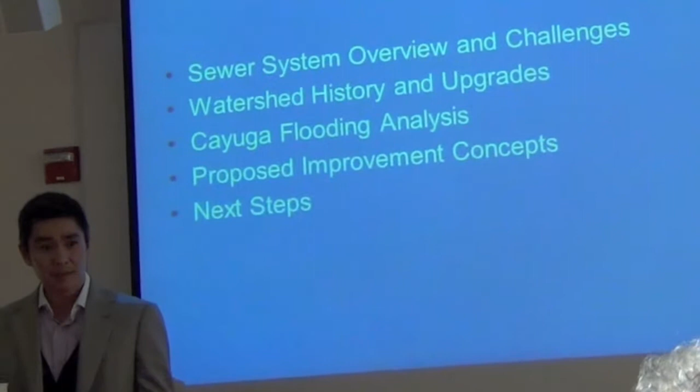So we're going to go over a couple of things in this presentation. First, I'm just going to give you a little background on how the sewer system currently works and some of the challenges we're facing. Then we're going to transition over to Kathy to give you a little bit more of a technical explanation of how water is flowing within this watershed that you live in. And we'll explain what these watersheds are and how the water is draining.

What sort of analysis we're looking at specifically along the Cayuga area as far as what we're looking at right now, and you'll see that they're not easy solutions, and they're pretty complex solutions. And then we'll go over some of those proposals, and then we'll go over the next steps and ways we're going to continue to work through this process.

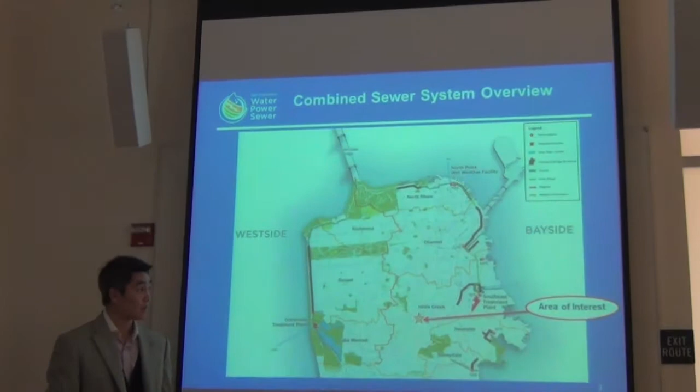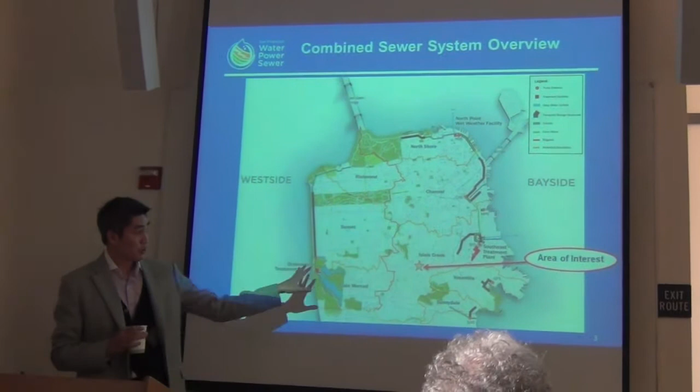But none of these solutions are going to be, and I preface this now, the complete solutions. The Public Utilities Commission is the agency responsible for the operations and management of the sewer system. And of course, all of you know that we also deal with the drinking water system and municipal power. But all in all, we have about 1,000 miles of sewer pipeline that cross every single city street. We have 2 24-hour treatment plants that are treating water and a 3rd wet weather facility.

So on a normal day, we're treating about 70 million gallons of sanitary sewage a day, so a day like today when it isn't raining. When it does rain, the system actually treats about 500 million gallons of combined stormwater and sanitary flow.

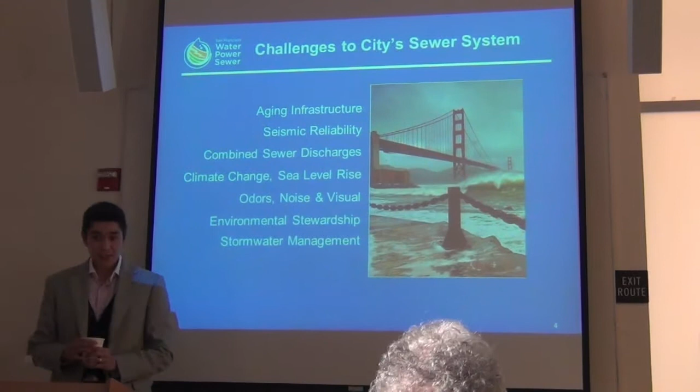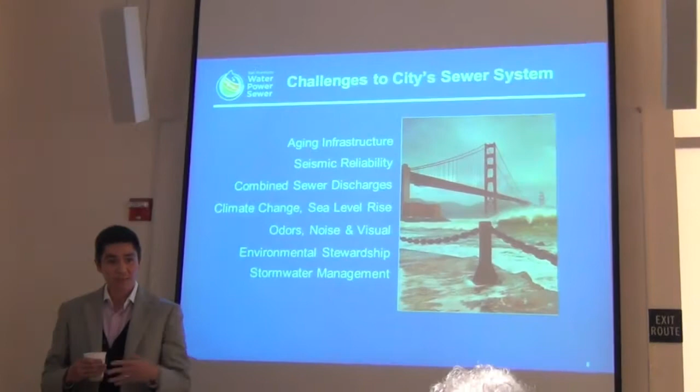Some of the challenges we're dealing with right now are along these fronts. We have obviously a very old system with San Francisco being an old city. We have sewers dating back all the way to the gold rush, and of course we're working as fast as we can on a repair and replacement program to replace those. Seismic reliability, making sure that our facilities are in good standing order so that when we do have an earthquake, when it does happen, that we're able to resume service without interruption to homes and businesses. Combined sewer discharges, and then of course stormwater management, which is the focus of what our talk is today.

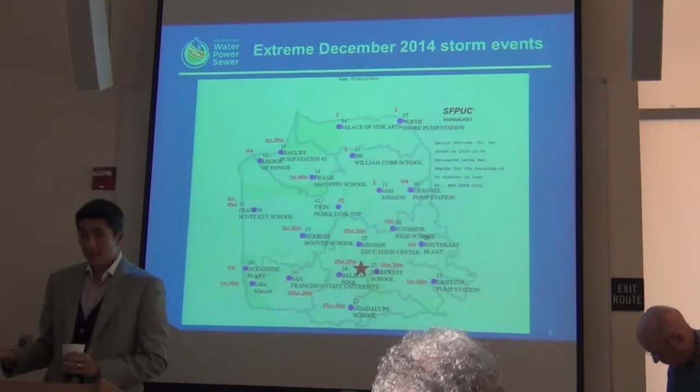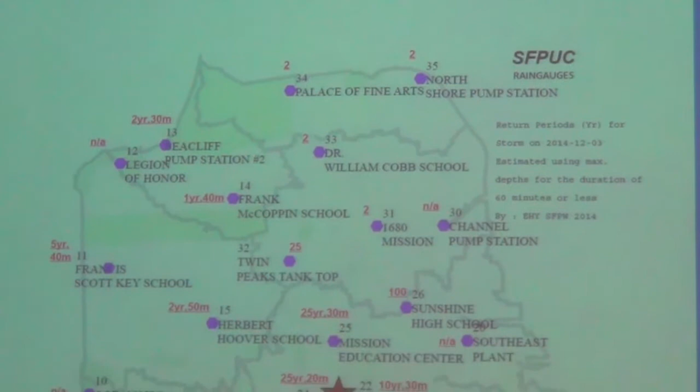So here's what happened in December of 2014. The system is designed to carry a certain amount of flow in it. In this case, the engineers call it a 5-year storm criteria. So it's really just a probability of how much water is going to be flowing within the system for a given period of time, and what the probability is of that occurring.

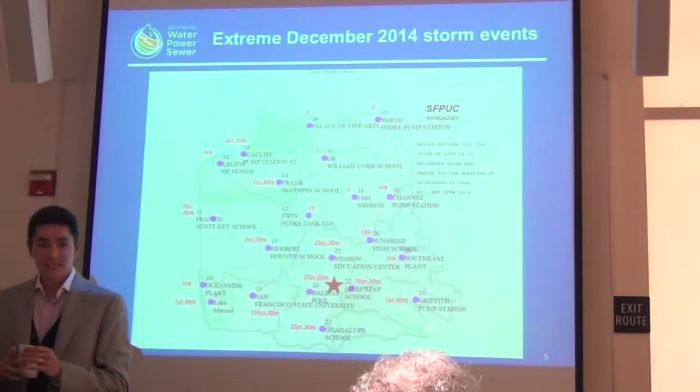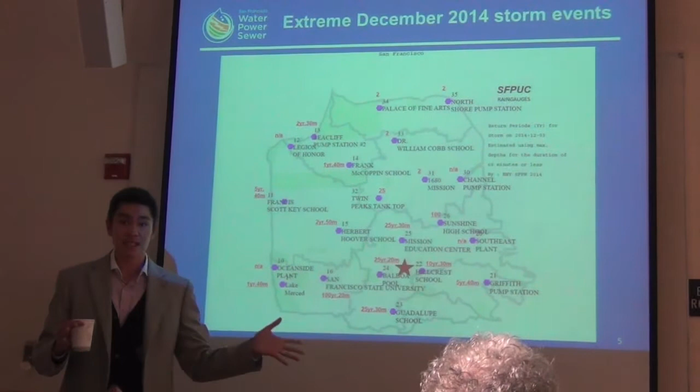What we saw on, I think this is the December 3rd storm? Yeah, so the December 3rd storm, we saw a lot of water, and everyone remembers that storm especially. We had a 25-year storm, meaning there was a lot of water that fell within a very short window of time, overwhelming not only the sewers over in the Cayuga watershed, but sewer systems throughout the entire city. There were manholes popping open because of the amount of water and pressure that were flowing through, and we had significant flooding in other areas of the city besides Cayuga.

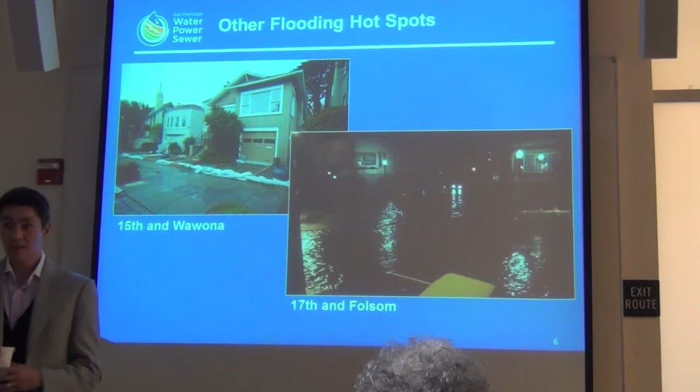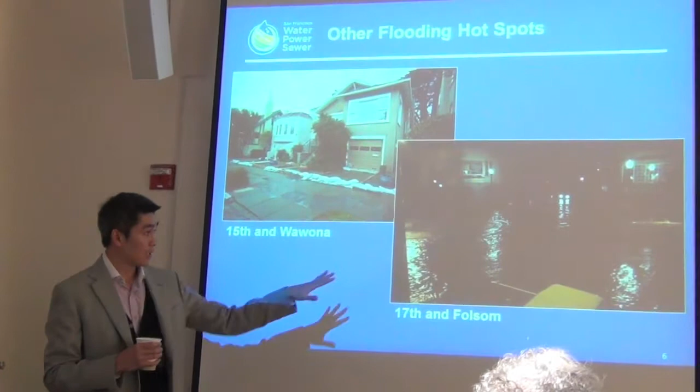These are 2 other areas of the city which experienced flooding during the December rainstorms. 17th and Folsom is an area where we repeatedly see flooding, where the amount of stormwater flow gathering within that area is greater than the system can convey out of there, and so this is what results. We also had flooding over at 15th and Wawona.

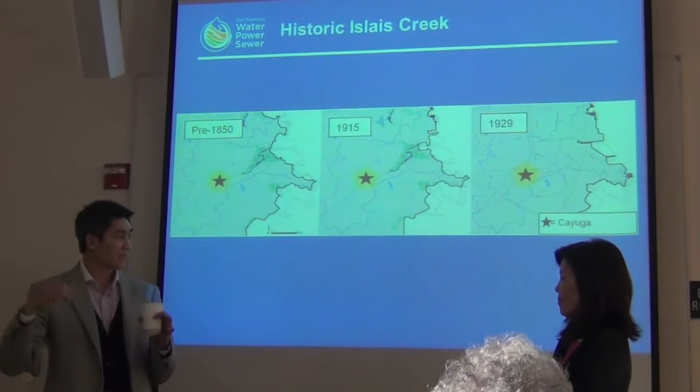So now that we've laid the context of the overall system and how it's functioning, I'm going to transition over to Kathy. She's going to give you a walkthrough in time of what this area used to look like before, how the water is flowing through it, what area it's collecting, and what the watershed is made of, and why we're seeing the challenges we are facing today, and then some of the next proposed concepts.

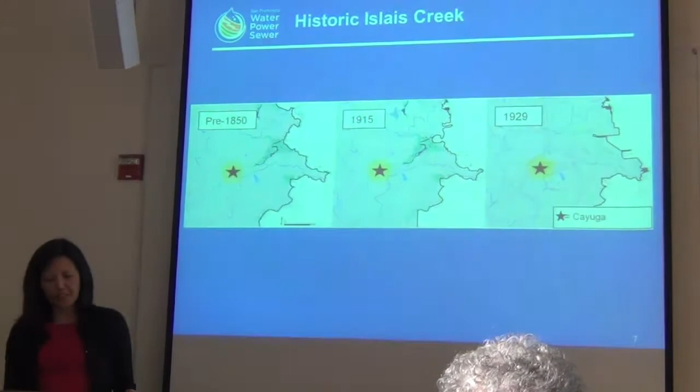So until the early 1900s, the water flowed from the tributaries in Upper Glen Canyon and Outer Mission to Islais Creek and flowed through the neighborhood surrounding Cayuga. This slide shows how Islais Creek's original flow pattern to the bay has been obstructed by the fill in the bay.

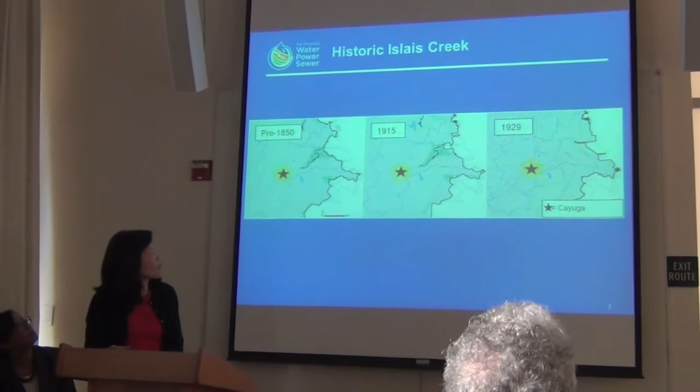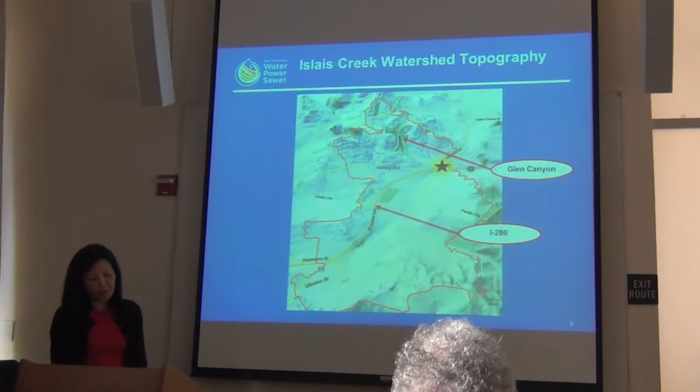The highest reaches of the drainage area just south of Twin Peaks are among some of the highest elevations. These, as well as High Point in McLaren Park and the Excelsior, form a classic valley where Cayuga runs along the bottom about 700 feet below some of the highest points.

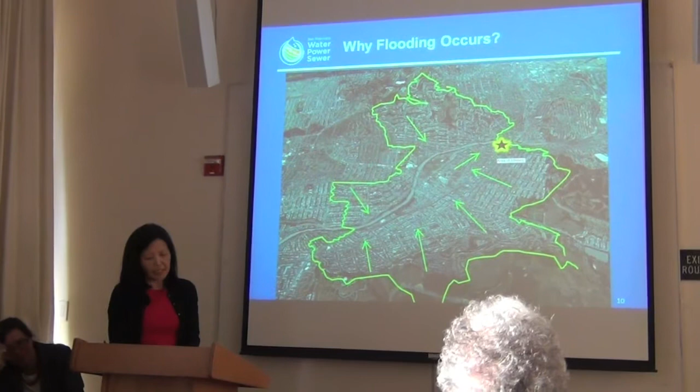And so this just shows why flooding occurs. There are hydrologic and hydraulic factors that contribute to the flood area. The local topography - Cayuga and the vicinity form a natural low-lying area where historically the Glen Canyon tributary merged with the rest of Islais Creek. These creeks were all connected into the sewer system.

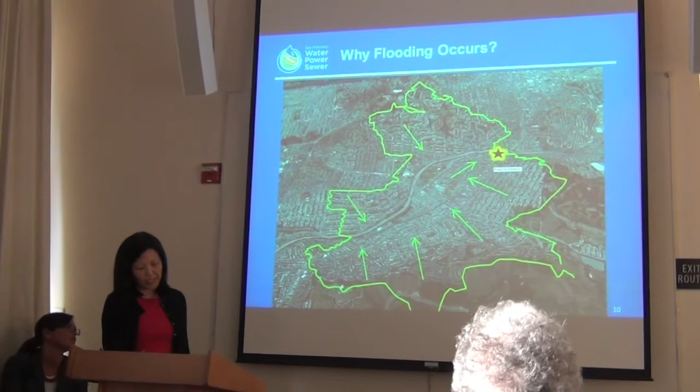The collection system is at capacity. Stormwater accumulates on the street in these low-lying areas. The natural drainage that has been available in the past is basically obstructed by the freeway construction.

Rainfall and runoff from the drainage basin, about 2,800 acres contributing runoff to the vicinity of the flood-prone Cayuga Avenue, is steep and highly urbanized. Rainfall falling on the drainage area turns to runoff almost immediately because of the urbanization and enters the combined sewer system and is conveyed to points downstream.

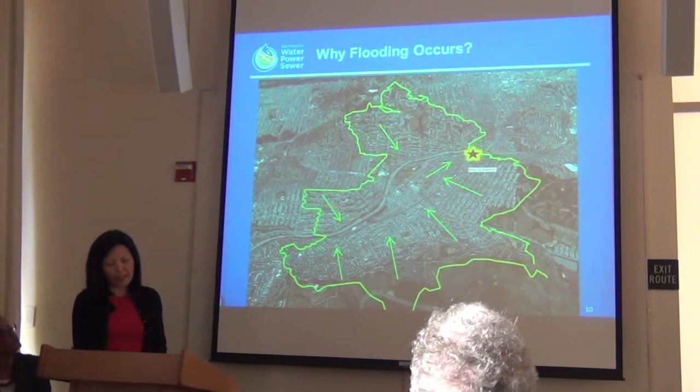The time it takes for the flow to travel from the upper drainage reaches to the foot of Cayuga at 280 is really short. The large drainage basin combined with the steep terrain can lead to significant flow in the collection system in a very short amount of time during large storms and even short storms with high rainfall intensity. The present sewer system is not capable of carrying the extreme flows that happen in a short amount of time.

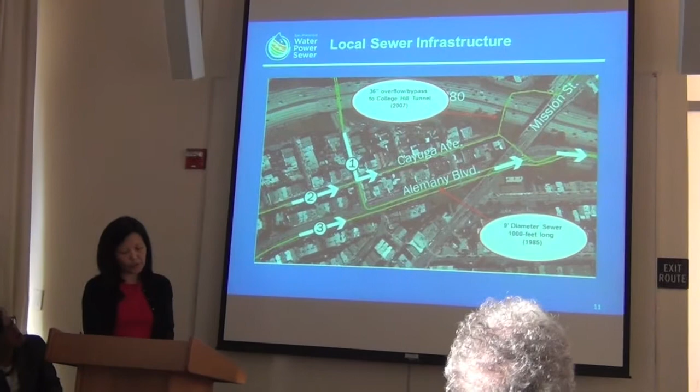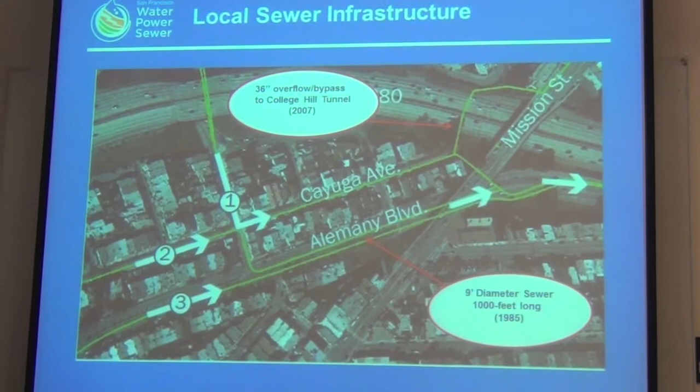So here you just see the sewer system that's at the foot of Cayuga. There are 3 major sewer drains that catch the surface flow. There is trunk sewer number 1, which carries sewer from Diamond Heights, Glen Park, and Bosworth. Trunk sewer 2 carries southern and western drainage and Cayuga Street flow. Trunk 3 carries all the eastern side and it is under Alemany Boulevard.

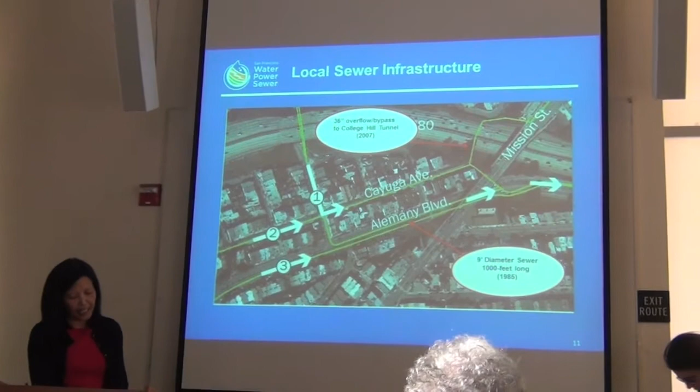So what's been done is that a new 9-foot diameter sewer was built in the 1980s, as well as a 36-inch bypass or overflow connection from the 9-foot Cayuga sewers to an existing College Hill tunnel in 2007. But even with this, they all still merge at the end into a 10-foot sewer, and so there's still not enough capacity.

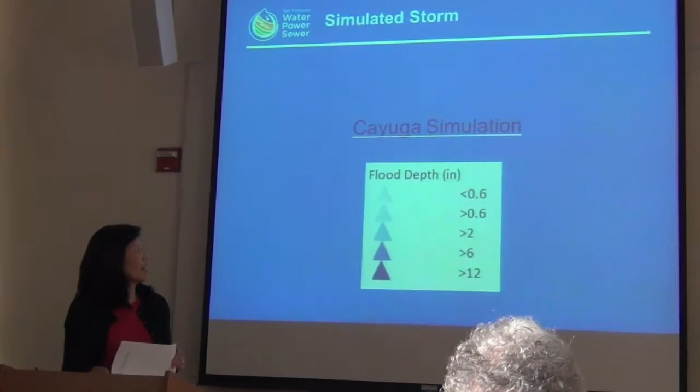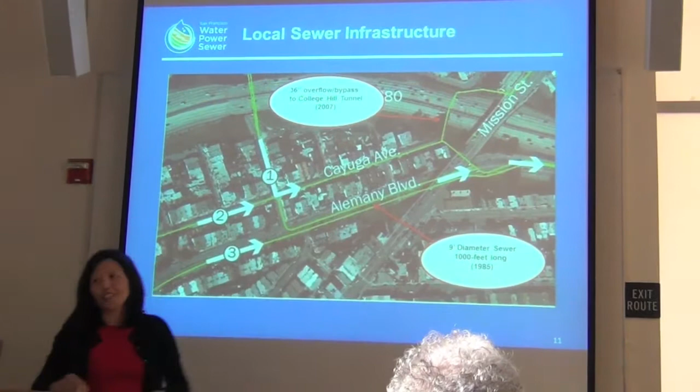Excuse me, where is that 10-foot sewer? That's at the end of Cayuga? That's the arrow, that's after it passes off this slide. So can you just show how everything comes together? So we have 1, 2, just making sure it's white on the map so people can see.

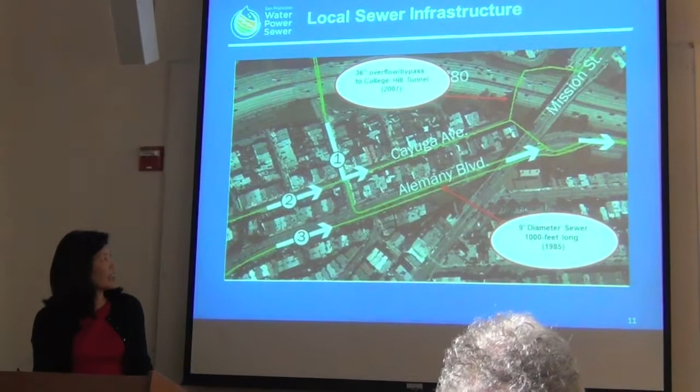What diameter is the tube under Cayuga? That's under Cayuga is 9 feet. 9 feet? Right, number 2 is 9 feet. Number 3 is smaller, but then Alemany, the auxiliary one which shows in 1985, that's another 9 feet. But they all exit the whole area into a 10 foot at the end.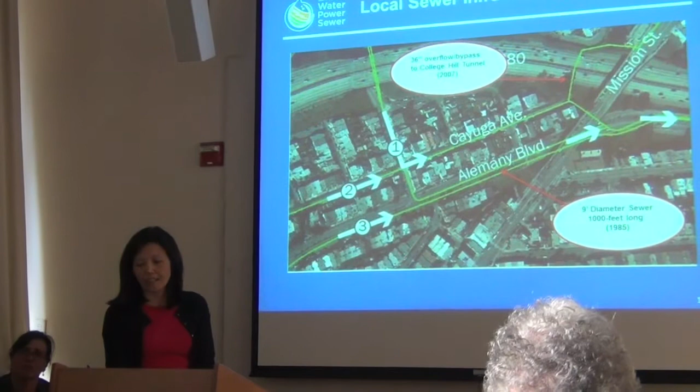At the end of where, Alemany? At the end of where? Past under, you can just point at the end. Somebody point to it. It goes there. Point it out. Right, that arrow. Can I suggest something?

The maps from the sewer show that it's 9 foot under there, but there's a box divided in 2, and each of those 2 is 10 feet by 6 feet that go under the freeway. So the capacity under the freeway is greater than the 9 foot. So I'm trying to understand why you say the construction of 280 is the problem if they gave us the capacity to move all of the water.

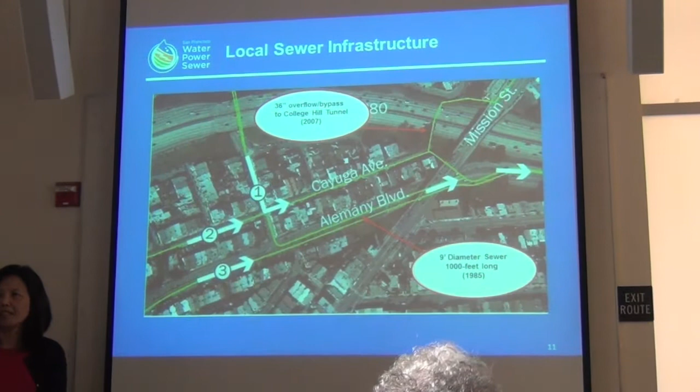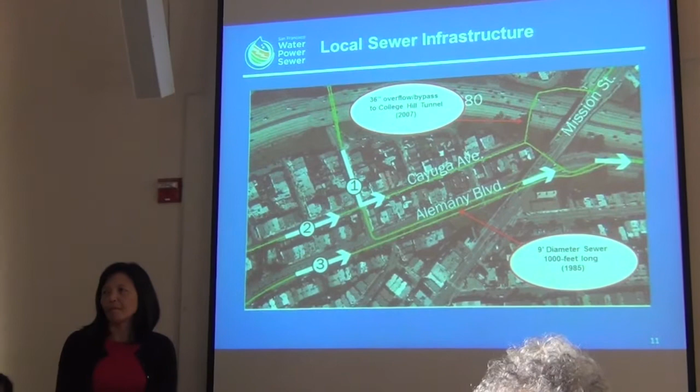Where does the backup begin? If the water flows under the freeway and it has the capacity to carry all of this, where does the backup actually begin? It has the capacity to move the water on regular days like today, what we call a 5-year level of service storm. However, when it's like 25 years...

No, what I'm asking is, I'll cut to the chase. Down there at 400 Alemany at Folsom, the sewer is about 2/3 as big as it is under the freeway. I'm suggesting to you that the problem isn't 280, because they have the capacity to move all of this water. The problem is down at 400 Alemany, where the sewer is seriously constricted. That's the bottleneck. And actually, I don't think we're saying that 280 is the cause of all the problems.

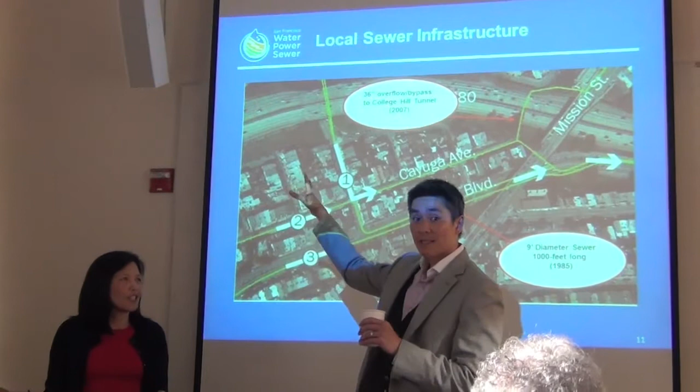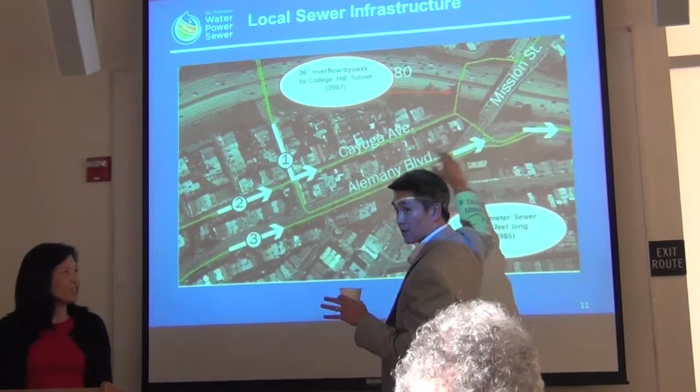You said it 3 times. If we're saying jump back, I mean, the major issue is the amount of water being drained in through the sewer at any given time, right? So you're right, this trunk line is larger in capacity as far as those 9 foot diameter tunnels. Still, that's rated to take a certain amount of flow, which is that 5-year storm we talked about earlier. So anytime you get a storm greater than that 5-year storm, or more rainfall being contributed, that's still not enough.

So even a 10 foot is not large enough? No, what I'm suggesting is that the bottleneck isn't there, the bottleneck is further down. I'd like you to address that question. But I can wait until later if you want. Why don't we just keep going with the presentation?

Could I just throw in a simple question? That 36-inch overflow bypass, which direction does it go? It's connected to College Hill Tunnel. Yeah, but which way is the flow? Downhill, right? Going down the other side, away from Cayuga?

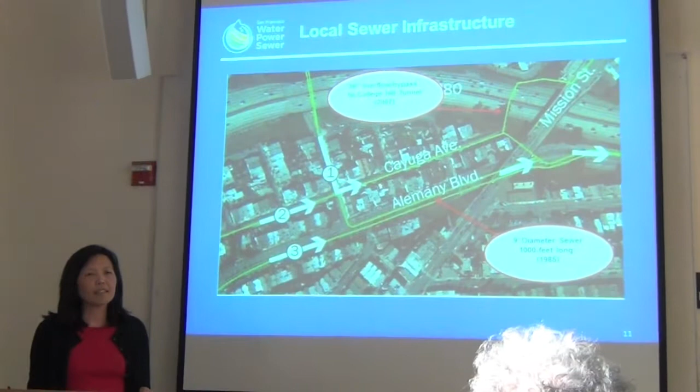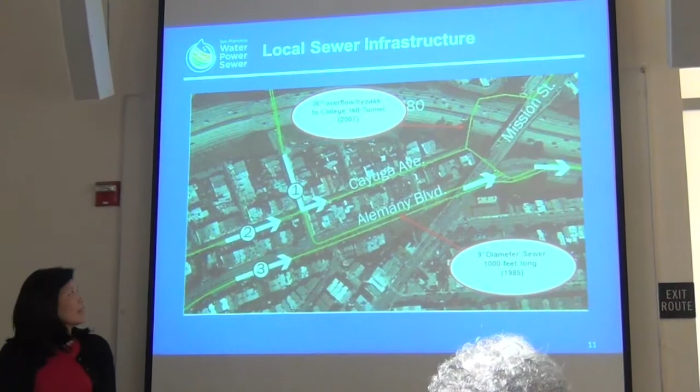And sorry, mine's simple too. What street is that, where number 1 is? It's Lyell. Oh, that's Lyell. Okay, yeah, we can talk about the sewer, we have our folks here that are more familiar with it.

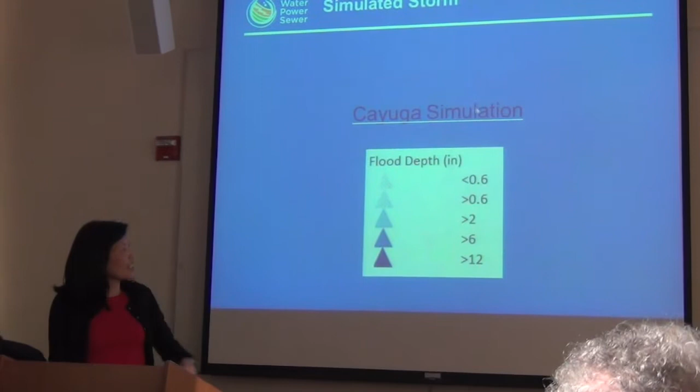So then, I just wanted to show you a simulation of how quickly it can rise in level. These are the legends: the darker color means 12 inches or more of water. This is an extreme condition computer simulation. Its intensity is in inches per hour.

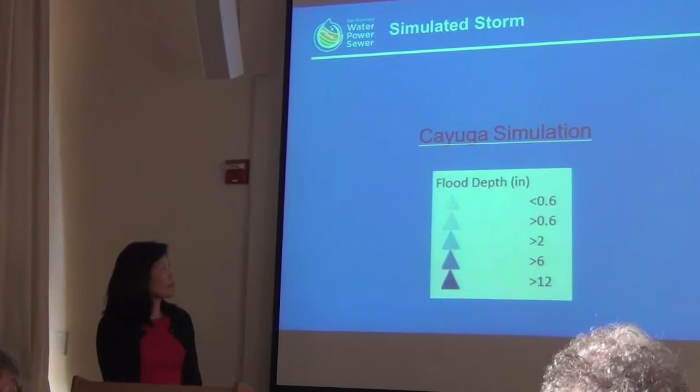No, these are good, the next slide is probably going to have the colors, it's going to have shades representing the depth of the water. The 5-year rainfall averages 0.72 inches per hour.

A 25-year storm would be somewhere less than 1 inch per hour if you take the whole hour duration. What I've observed over more than 35 years is that in San Francisco, it can rain like 20 hours straight and you don't flood. The Russian River floods, but we don't. What I see in the Mission District is periodically we get a storm cell that parks itself over Twin Peaks and dumps a lot faster than 0.7 of an inch an hour - maybe 2 inches an hour - for 20 minutes, and that's enough to flood us at 17th Street.

So I wonder if there's a different way to look at this. It doesn't matter how many hours it rains for, what happens in 20 minutes - that's when we get a flood.

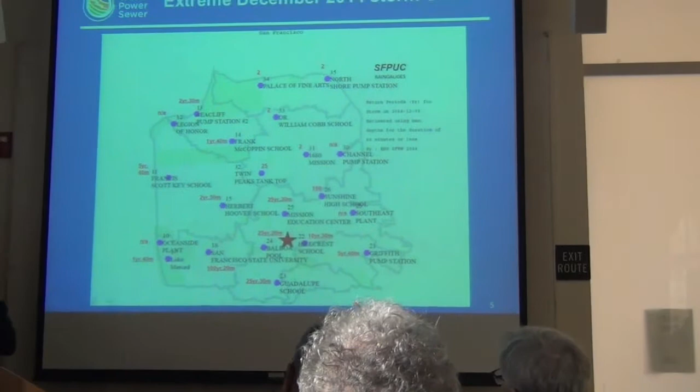Flash flood. Do you have numbers for that? On that map, it showed 20 minutes. Based on that 20 minutes, we determined the December 3rd rain, the storm, was a 25-year event. You see it says 20 minutes. That's the closest rain gauge, right by the star. Show me. 20 minutes, here, 20 minutes. Based on this, and some of it is measured differently based on how many intervals.

How many inches of water? I've got to pull the inches, I understand we have those results, those numbers. These are from the rain gauges - I think that's what we should be talking about, the number. I was just looking online the other day. The flooding happened twice, December 3rd and December 11th, and I know because I was one of the unfortunate victims. That first rain was 2.96 inches for the entire rain.

24 hours? Yeah, from 10 p.m. to 10 a.m., they're saying. And then December 11 is a lot smaller, but it flooded too - 2.36 inches. So I'm trying to figure out why it flooded twice, when the second flooding was less rain.

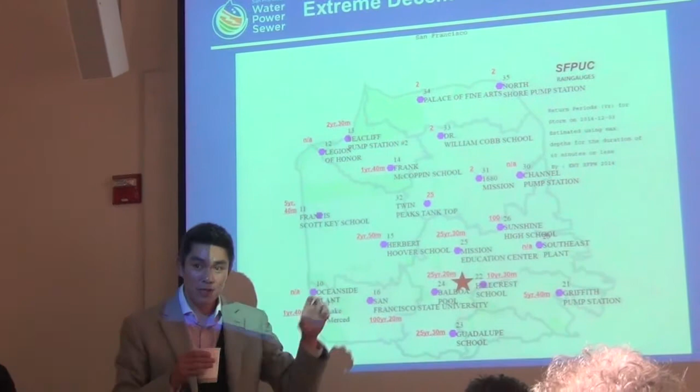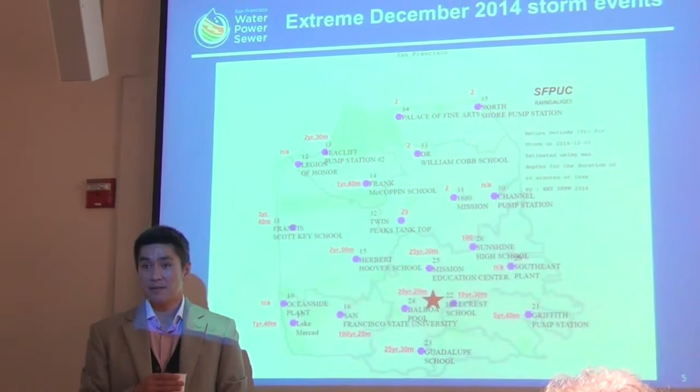It actually gets depicted on this map, because even storms aren't uniform across the city. When you look at what happened on December 3rd, we had a 25-year storm here, but up in the Seacliff area there was only a 2-year storm - less intensity. So when you look at the total rainfall across the city, that isn't necessarily an exact indicator of which areas will flood, because you can have one cell that just parks, like this gentleman said, right over Twin Peaks, which contributes to the flow in this watershed. That's part of the complexity of the analysis we're going to go over.

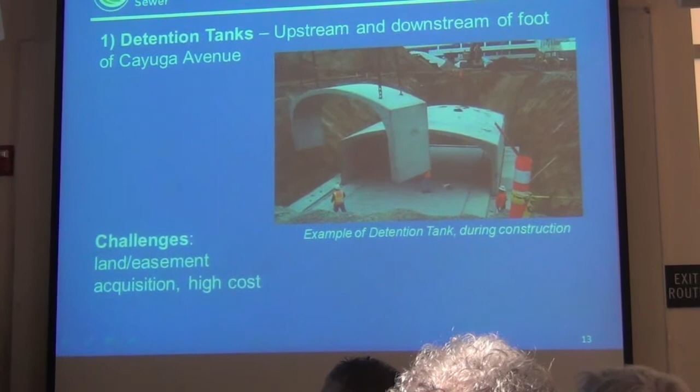This is one potential concept that has been discussed, having detention tanks upstream and downstream of Cayuga. The issue is that no matter how many tanks we put there, it's still not going to take care of all of the flooding, because again, we designed for a 5-year storm, not a 25, 35, or 50-year storm.

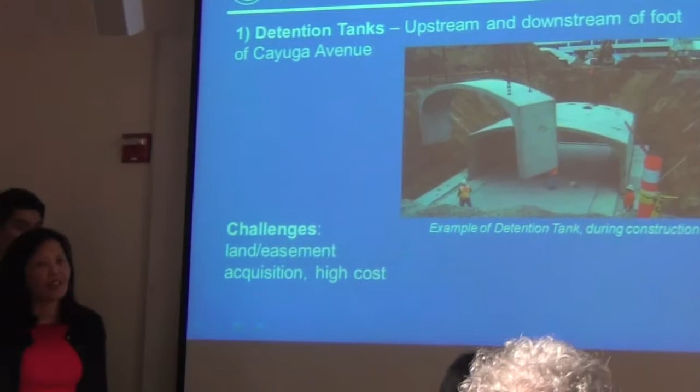What does a detention tank do? It basically takes some of that rainwater so the flow can go through the sewer, and it holds it until the sewer can handle it. Are you saying you don't have engineers on staff who can design and solve this engineering problem? Of course we do, but it's not that simple a solution, is what I'm saying.

There's land issues here, being able to find the property to put in these tanks. How about under 280? That involves relocating land to Caltrans.

Got it. The issue is one tank wouldn't resolve it, because we're looking at 10 million gallons of storage. It's got to be multiple tanks, and then the issue of cost is enormous. It's not just fixing sewers, we're talking about a lot of capacity and storage we need.

So what do you guys think would fix it? Here's another possible concept. We talked about diversion of the former creek water from the combined sewer system, because right now the creek water is going into the sewer system as well. And again, the challenge here is land and easement acquisition and cost.

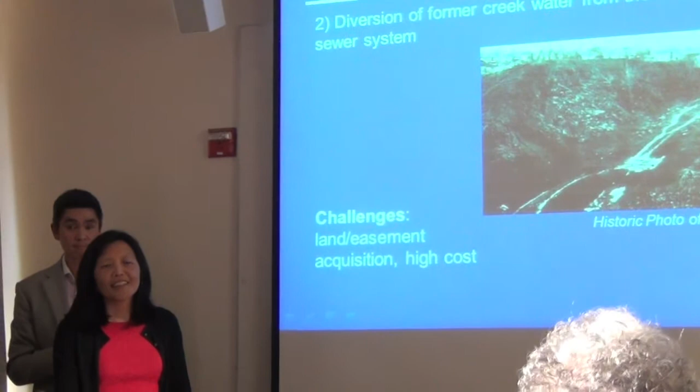Could you clarify, you said diversion of former creek water - is the creek still active at this point? Yes, it is. It's just underground, right on Cayuga. It's under my backyard. The water is actually diverted right into the sewer line. Got it. Okay.

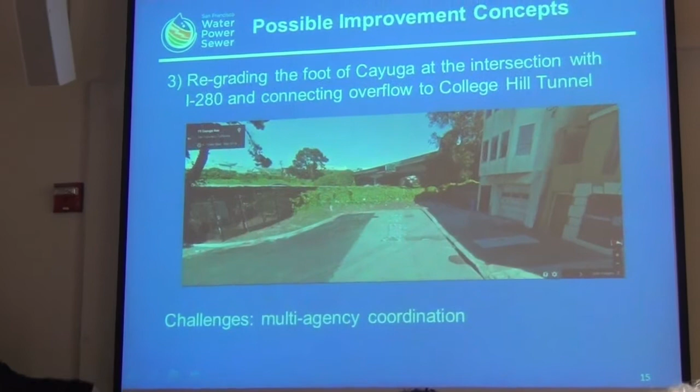It goes right there. This is another concept - re-grading the foot of Cayuga and 280, connecting the overflow to College Hill Tunnel. And we would have to coordinate with multiple agencies.

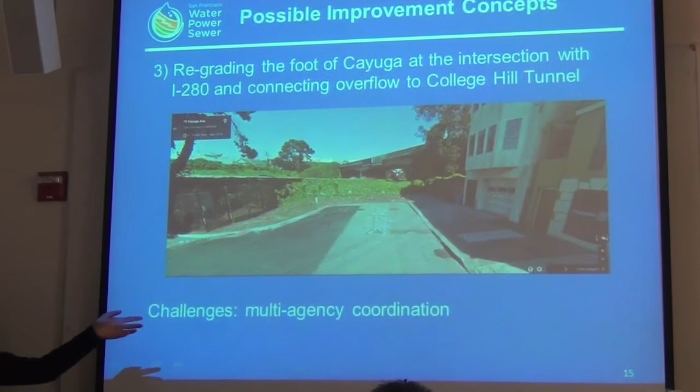So that's the end of Cayuga, right? You need to speak out this way, because when you're facing the board. I'm sorry. So this really is a third concept that basically would tie Cayuga with I-280 so that the water can flow toward College Hill Tunnel.

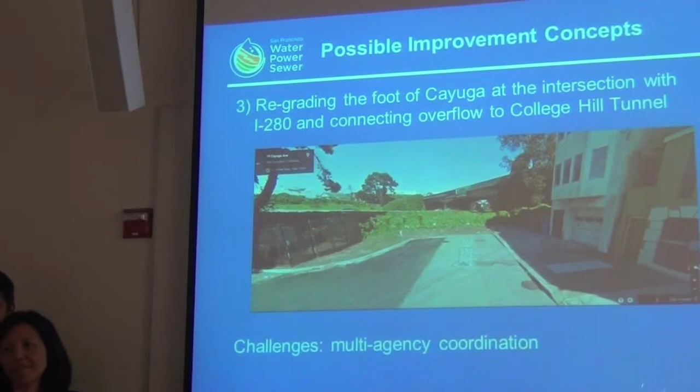Yeah, well, I live on that block. There's a bunch of us, and we know what that water flow is during the storm, during the flood. It was up to my chest. And that's why quite a few of us are here because of that.

And that's that block. Right, so we're talking about opening up and getting rid of that berm or that hill so the water would flow through. Okay, that'd be fine, it gives a little bit more space for spreading.

It could be effective bringing that depth at the end down, but again, on its own, this is probably the least effective for the upstream floods. Meaning that if you're a block off, this wouldn't help you as much. Okay, so again, this shows the complexity - it's not one solution. One thing wouldn't resolve it.

Do we know if the flooding was caused by an overload of the sewage system, or the inability for the mass amount of water to get into the sewer system? Because after the storm was over, all the storm drains within a 100-yard radius of my house were totally clogged. Has that been studied? We looked at it, yeah. Because if the water can't get into the sewer, it just stays on top of the street, and it's going to find its way into people's houses, right?

We saw that video, there was a geyser of water coming out of the sewer. Right, yeah, we saw about 8 of them just from my porch.

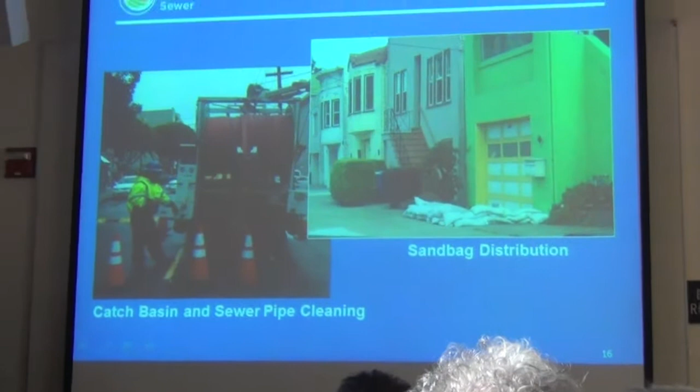I just want to put this out there, no more talking about sandbags because they don't work. Yes, it's not a solution.

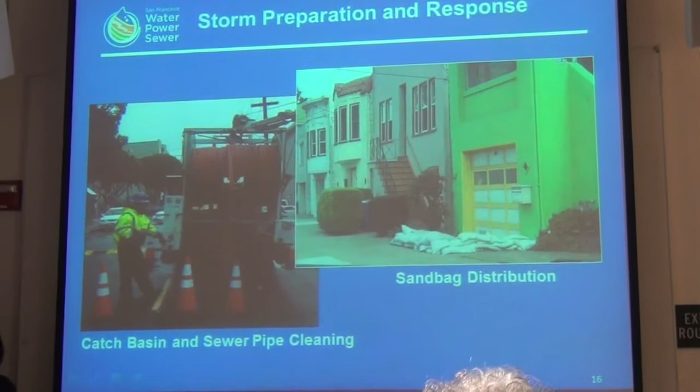The other thing is that our PUC also has a grant program for flood barriers and backflow preventers, so we're working on that. But they cost about $8,000 to install, and the grant's only for $2,000. So that's why we're looking at modifying that grant.

I have one more thing to say. We're working on that right now. That house there with the bush out in front, the big one, next to the greenhouse, that's my house.

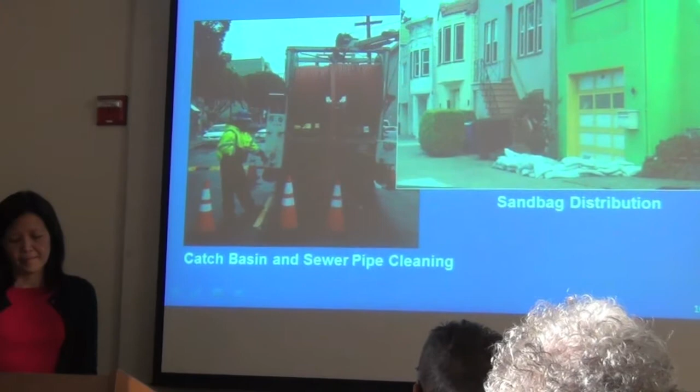And the water was that high. So when I say it was up to my chest, I wasn't kidding, it was that high. So that means everybody who was on that block and across the street, and I really don't know about the block before us, their bottom apartments or houses.

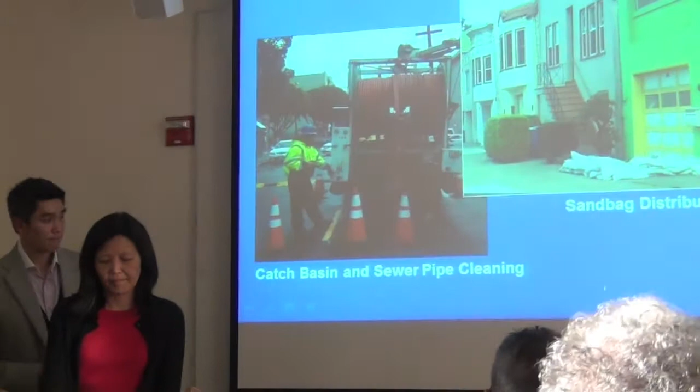And any of the cars that were parked in the garage are pretty much totaled for the second time this time around, and the ones that were parked on the street too. How many cars total? So, 3 cars total. Is there another one in our house?

So basically, we're almost done. We'll open up. Oh, yay, sandbags! That's y'all's best idea, sandbags.

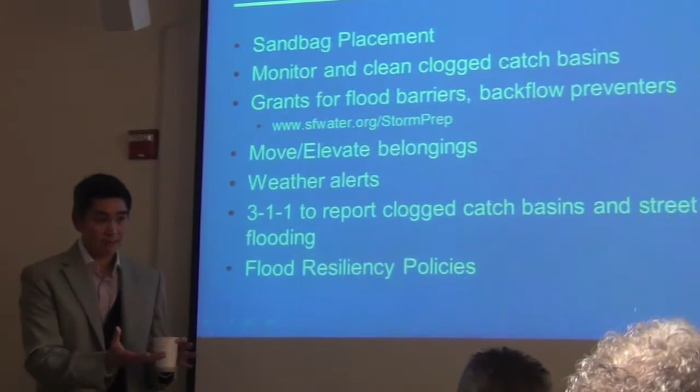We're dealing with interim solutions and the challenges we have, knowing how large these detention basins are and the land acquisitions necessary to do some of those larger projects. We're going to continue working on that front, but we have to have short-term measures too, working together on things like monitoring clogged catch basins, like we talked about.

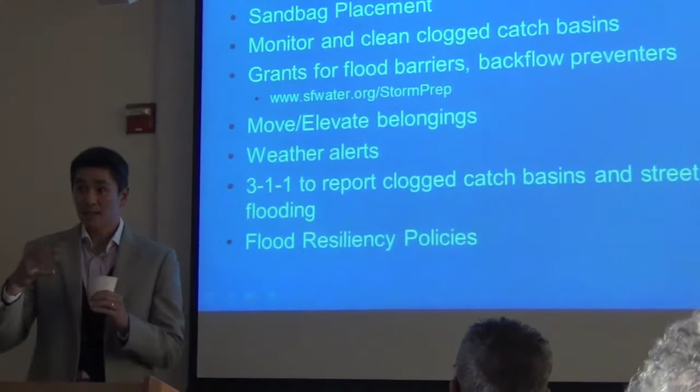Sometimes those catch basins get clogged. We're going to go out there before the storm, and we're going to be out there during the storm to see if we can clear any blockages. Anything you can do to relieve blockages from the catch basins you see will be helpful.

We are making modifications to the grant program to provide additional money for barriers in place of the sandbags. It's more of a permanent solution, and we're working through that right now.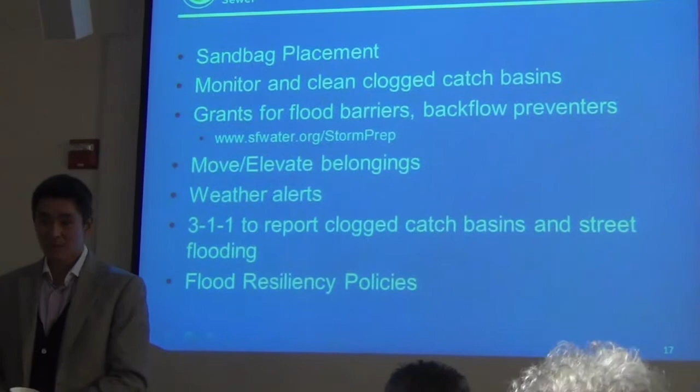Elevating belongings, weather alerts - we're going to set up an email distribution to give you as much advance warning as we can as we know when severe storms are coming. Definitely call 311 to report anything.

The last piece, as we've been talking about the challenges, is that we can design and engineer our system with enough money up to a certain standard. We can engineer our system up to a 25-year storm to handle what happened on December 3rd. But that doesn't mean that a year later, 5 years later, there won't be a 26, 27, or even a 100-year storm that overwhelms the system.

The challenge we face is that when we look at the topography, this is the lowest point in the entire watershed where water gravitates, and we can't change the overall topography of the city no matter what we do. So the policies we're trying to set up are so that we're not coming back saying we're going to take care of every single storm, because we'd be lying to you if we said we could take care of every single storm, just like any person would be lying saying they could take care of every single natural disaster.

We can design buildings up to a certain seismic code, but that doesn't mean there isn't going to be a greater earthquake larger than that code. So the policies we're trying to set up, not just for Cayuga but for all the areas flooding around the city, are about trying to elevate.

We know there's an issue in these low-lying areas. We're going to take action working with the supervisor's office and the mayor's office to figure out what we specifically are going to design these sewer systems for. But we don't want to give the false expectation that you'll never see flooding again. We do want to be there to try to help and mitigate what's happening there right now.

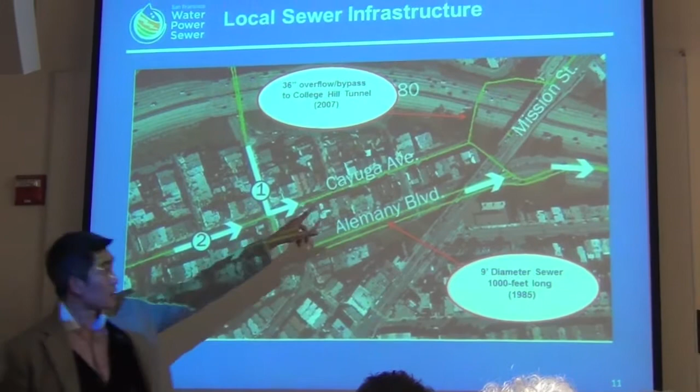Where was it done? This connector bypass right there is that 36. And where does that eventually flow to? It's the College Hill tunnel. And where does that go? Eventually, everything goes over south towards the bay, to our treatment plant, by way of Cesar Chavez and the storage box.

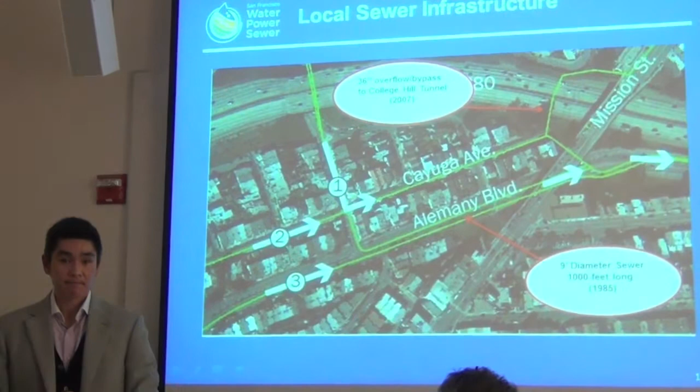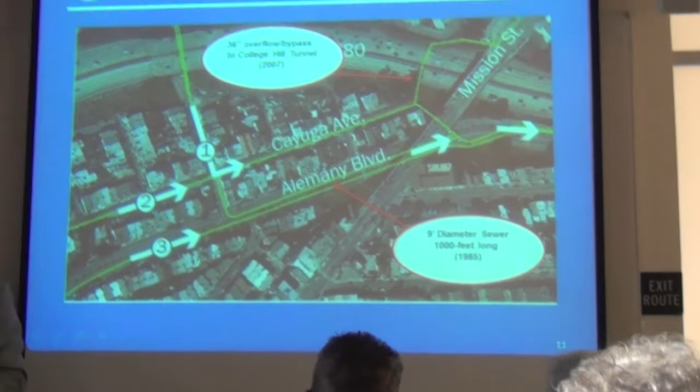The line that comes down Lyell, when you have labeled 1, it looks like that's actually 2 lines. If I'm reading your diagram correctly, it looks like 2 of them coming together. Up at the top it's split, so it looks like it might be 2 separate ones. It's just one major line. But it seems like just diverting that line on the other side of 280 somewhere would help a lot.

So over the last 4 months, this is what you guys have basically come up with? This is your analysis, and then you're basically telling us that you have more analysis to do.

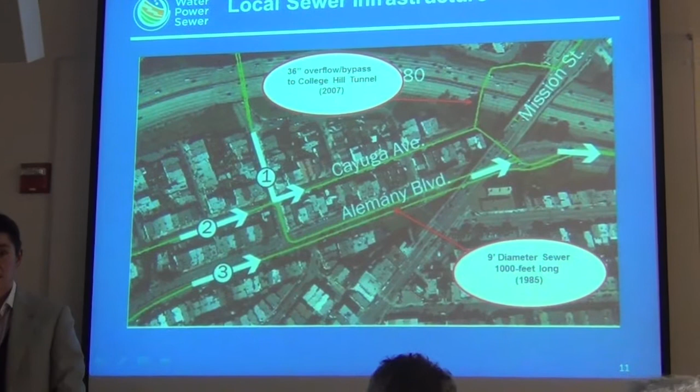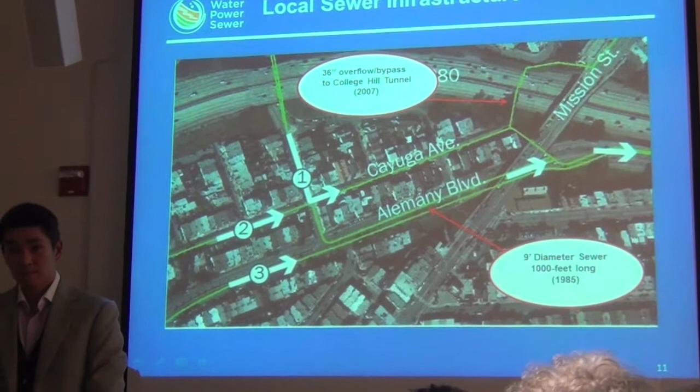Yeah, we have to do more calculations to determine. Do you know what happened on December 3rd? Was it because there was a bottleneck at a certain point, or are you just saying it's simply a 25-year flood? But what does that mean though? It just means it was more than the sewers were designed to handle. That's basically what happened, there was more rain within that period of time than the sewers could handle.

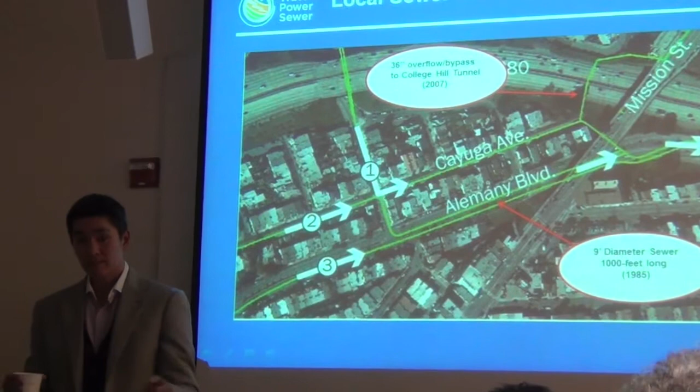And so the water, because it had nowhere to go throughout the entire network of sewers, went to the lowest point. The water just went down.

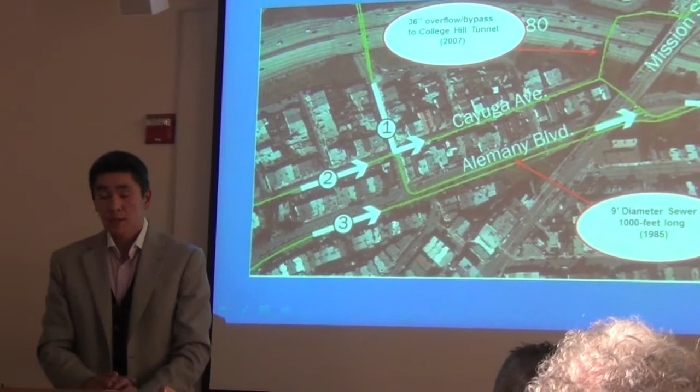With this analysis you guys have done, have you been able to say, right, okay, we're going to do this analysis, and somebody above you said, yeah, we'll fund it? Is there active funding for it? And that's the next step, is to determine that level, right? Because remember, is a 10-year storm enough? Is a 25-year storm enough?

But we don't really care about the year storms, there's a problem and a solution, so let's just talk about: here's the problem, and if you guys can say here's how we're going to fix it, that would really help our anxiety, because it sounds like you're just throwing stuff up there. We don't care that much about the year storm. If there's a problem and a solution, and it costs $100 million, you should be able to tell us: over the last 4 months we have a couple of solutions, here's what we think is going to work, and this is what we've got to prove for the budget. It should be that simple to tell us that.

That'll definitely be the next meeting where we're going to actually tie together. Remember, it's not just one detention tank that's going to solve it, it's going to be a combination of all of these different types of projects.

And we're outlining how much water each one of these diverts away from this area, so we can come up with a menu, and associated with that will be a price tag, showing you whether that solution would have handled, for example, the December 3rd storm.

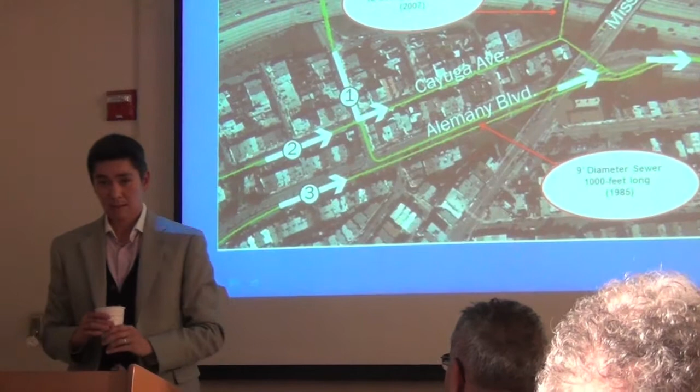I'm curious, how many times per year is the system actually tested? It seems more reactive than proactive at this point, where you understand there is topography, there is an active creek, and yes, there are weather changes going on.

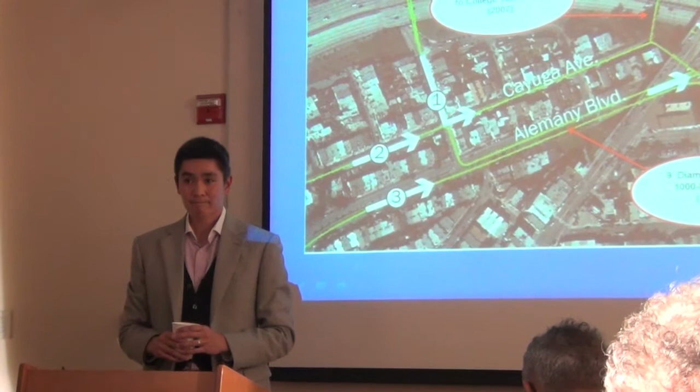With climate change, or whoever wants to argue with that, I really don't care, but critically, we have more rainfall. So why is it that something as dire as this needs to happen before we can take a look at the system as a whole, instead of getting to a point where it's exasperatingly expensive to find a solution, rather than chipping at it, maybe putting in a couple thousand here, a couple thousand there, and spreading out the budget? I just don't understand why it's more reactive than proactive.

Some of the historical photos we saw earlier, the sewer system for this area was designed in the 1930s, so we're dealing a lot with infrastructure that's already in place. Since the 1930s, haven't we known about this information? It's 2015 now, correct me if I'm wrong, but since then we've known certain factors. So why has it just been now, or 10 years ago, that we've actually taken a good look at it?

Has it been confirmed that it wasn't a maintenance issue rather than the storm being overwhelmed? Yes, because this is part of what we do pre-storm, a sweep of all these areas, especially these low-lying areas.

We have teams that go out there to inspect the catch basins and make sure they're clear, and we have routine in-sewer line inspections. The challenge is that when you get severe storms, everything washes into those catch basins, so even if they're clear, we try to keep them clear so they can flow as freely as possible. We have reports of things like trash bags covering catch basins that end up flooding intersections because the water has nowhere to go.

Well, Guy Phillips' drain was clear. It wasn't even a rainy day. It rained just a week ago, and it flooded. He said it was clear, and they came back out, and it wasn't clear. So I don't know what you guys do when they're out there, but maybe they need to be retrained, or they need cameras, because the guys who come out don't have cameras, they're just shooting their power washers through, saying it's clear, and then I ran my water and it flooded right there in front of them. Maybe you need to get more equipment for these guys.

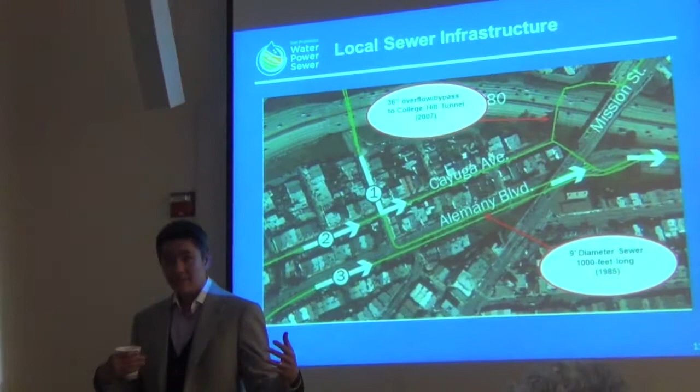More development over existing green space would be counterproductive. One of the things we implemented about five or six years ago is a stormwater ordinance, so any new developments actually have to manage a significant portion of the stormwater flow from those developments on site, so they're not contributing more stormwater to the sewer system. So that's a change that we have.